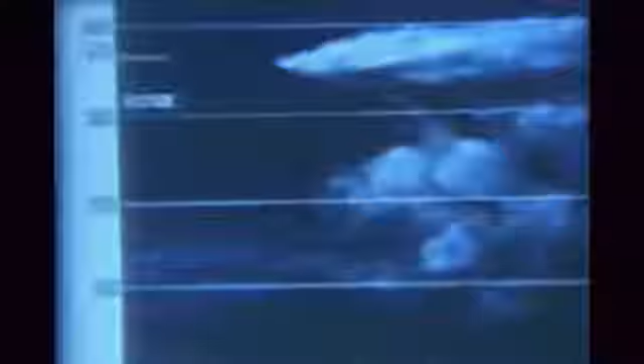July 13th, 1963. High over O'Neill, Nebraska, a B-720 aircraft is en route from San Francisco to Chicago with 53 passengers and a crew of 7. Thunderstorm activity is evident some 40 miles to the right of the flight path. At flight level 370, turbulence is encountered. Clearance is received to climb to flight level 410 in an attempt to top layers of cirrostratus clouds ahead.

As the climb is started, the aircraft experiences turbulence and goes into a sharp pitch-up. The instruments show a drop in airspeed and an increase in altitude. This is followed by a series of up and down drafts with high and low speed stall buffeting. The pilots report the attitude indicator to be unreadable at both extremes. The airplane then goes into an uncontrolled high-speed dive. Recovery is finally made at 13,000 feet.

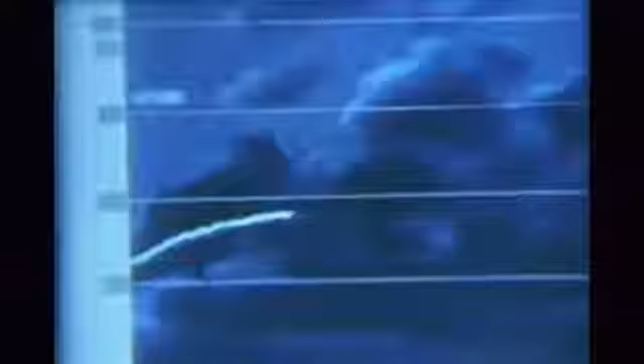November 9th, 1963. A DC-8 aircraft carrying 117 passengers is climbing through 18,000 feet after takeoff from Houston, Texas. Suddenly it encounters a severe gust that causes a rapid increase in rate of climb. The pilots report airspeed drops from 260 knots to 0. Control inputs are made. The nose pitches down and the aircraft goes into a steep, uncontrolled high-speed dive. During pull-out at 5,000 feet, the number 3 engine and pylon are torn off. The aircraft lands safely.

September 14th, 1964. Another DC-8 aircraft is cruising at 37,000 feet over the Pacific on a flight from the Philippines to Japan. There is typhoon activity in the vicinity. Suddenly, the aircraft hits turbulence and experiences a substantial increase in altitude. Then it noses into a 20-degree uncontrollable dive. Recovery is finally started at 21,000 feet, and the aircraft levels out at 17,500 and continues on its flight without further incident.

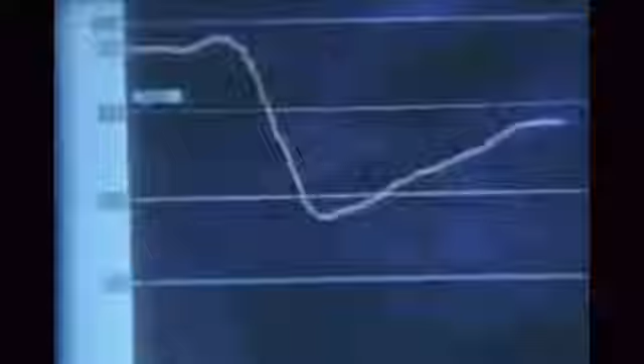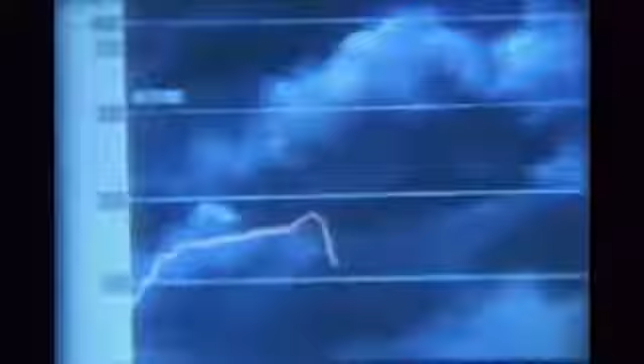February 12th, 1963. A 720B aircraft carrying 35 passengers and a crew of 8 takes off from Miami International Airport bound for Chicago. Considerable turbulence and thunderstorm activity is reported in the area. In his last radio contact, the pilot reports he is just out of 17,000 feet. The aircraft apparently enters an area of severe turbulence and goes into an uncontrolled high-speed dive. It crashes in the Everglades west of Miami. The wreckage pattern indicates a breakup in the air. All aboard are killed.

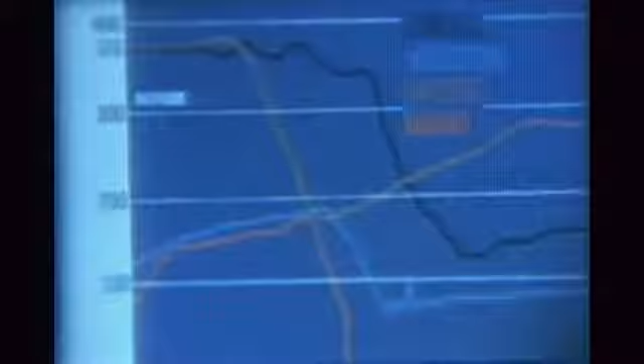All 4 of these major upset incidents are remarkably similar. When the flight recorder altitude tracing of each incident is superimposed over the others, this similarity becomes apparent. A thorough analysis of these incidents gives us some significant clues as to why these upsets have occurred. To understand them, we must review some basic principles of aerodynamics. Remember how an aircraft gets its lift.

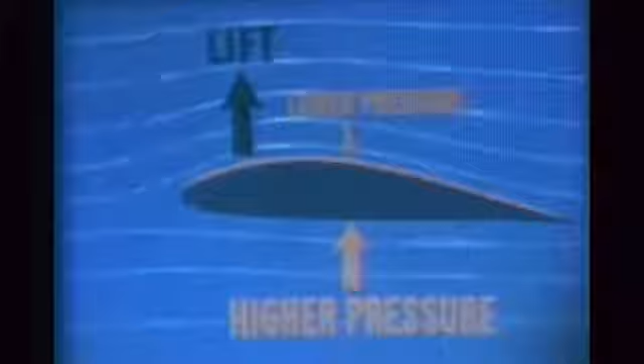The airfoil design of the wing causes the oncoming air to split, with some of it moving under the wing and some going over. The moving air forms a high-pressure area below the wing. However, the camber of the wing causes the air across the top to travel a longer distance. This results in an increase in speed and a lower pressure. It is the difference between the high and low pressures acting on the wing surfaces that causes lift in any aircraft.

Now, with the high-speed jet transport, another factor enters the picture. As the jet increases its speed into the higher subsonic ranges, the air flowing over the upper wing surface will at some point reach the speed of sound. This point is called the critical Mach number of the aircraft. At the critical Mach number, a shock wave is created on the wing, perpendicular to the flow of the air.

The shock waves normally form first at the root of the wing, where the camber is greatest. As the speed of the plane increases, the shock wave moves out from the wing root, and the center of pressure on the wing also moves out and aft. In other words, shock waves spoil lift inboard, and since inboard on a swept wing is the same thing as forward, lift is spoiled forward, and the nose naturally wants to go down.

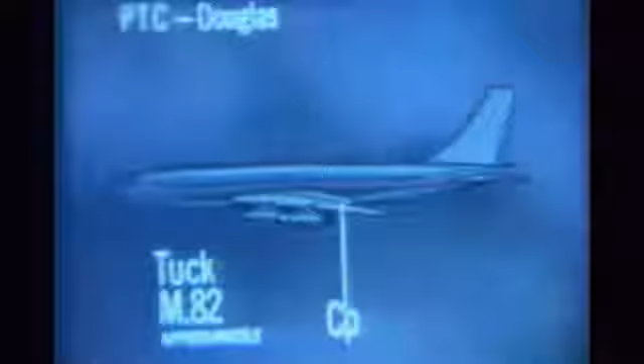The shifting of this center of pressure aft tends to make the aircraft nose down and increase speed. This, of course, is the phenomenon of tuck. It occurs about Mach 0.82. To provide stability at speeds above Mach 0.82, aircraft designers have installed control devices to overcome tuck. The pitch trim compensator in the Douglas jet aircraft cranks in an extra force on the control column for additional elevator. The Mach trim of the Boeing aircraft actually makes a stabilizer correction to prevent nose-over.

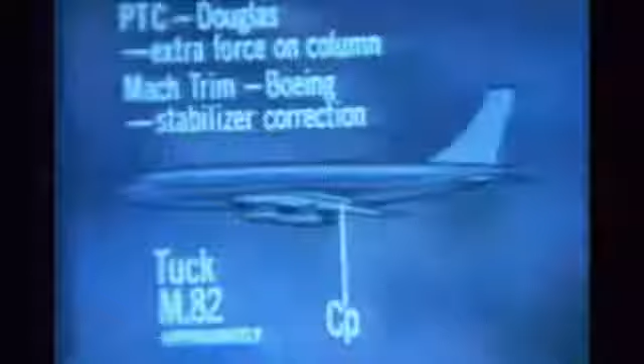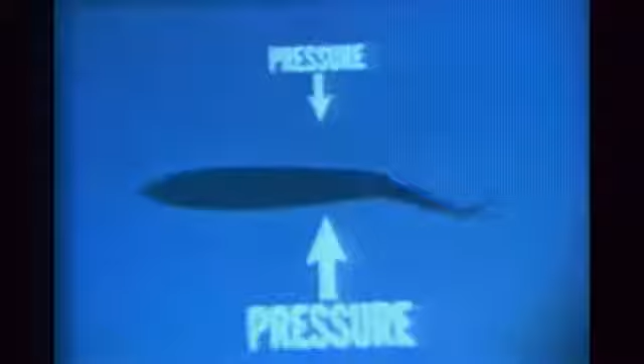This brings us to the stabilizer elevator surface itself, a critical element in the upset situation. Remember, the elevator on the jet transport controls the aircraft not because the air hits the surface and causes the plane to deflect, but rather because movement of the elevator changes the camber of the combined stabilizer elevator system and causes a greater or lesser pressure differential on the upper and lower surfaces.

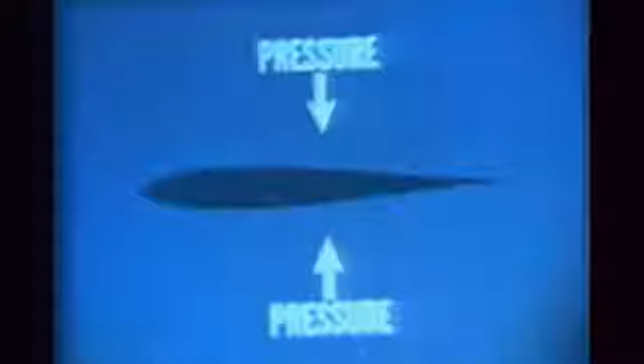Shock waves can develop on the stabilizer surface just as they do on the wing, but the greater design sweepback and thinner airfoil of the stabilizer prevents this from happening until the aircraft gets to speeds higher than its critical Mach number. But the point is this: shock waves do form on the stabilizer near normal cruise speeds, and when they do, they so disturb the air behind them that the elevator loses some of its effectiveness.

This graph shows how elevator effectiveness is related to speed in present-day jet transport aircraft. As speed increases, elevator effectiveness decreases. And you can see that at the cruise range for normal jet operations, the elevators may be less than 50% effective. This is plenty for positive control, of course. But let an overspeed condition develop, and trouble occurs.

Above MMO, the elevator has lost a substantial amount of its control effectiveness due to shock wave formation on the horizontal tail surfaces. This may not be too important in level flight, but if the nose is pointed down in a dive, it can present a severe problem in immediate recovery. Elevator effectiveness will return when Mach number decreases. A dive will result in decreasing Mach number as lower altitude is reached, so a dive itself can help bring about a successful recovery of control.

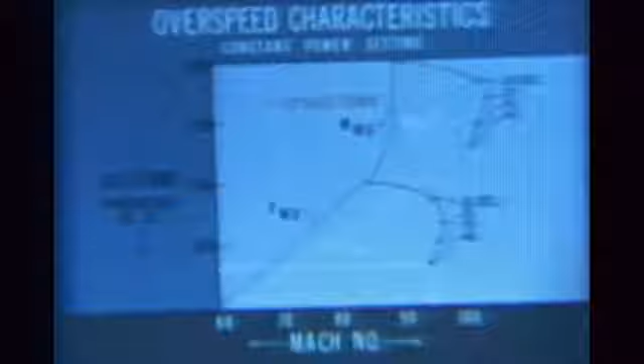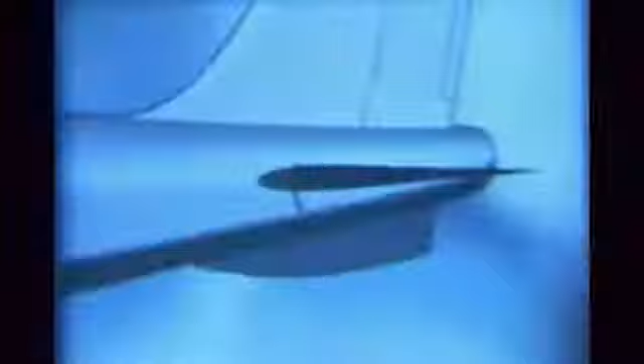At lower speeds, there is full elevator effectiveness. That is, unless the aircraft is in an out-of-trim condition. The movable stabilizer of the jet transport permits you to establish an angle of attack or indicated airspeed and keep it there. You know this, of course. In normal flight, this angle is always positive. It may range from close to 0 in high-speed flight to as much as 16 degrees at stall.

An aircraft can descend, cruise, or climb, trimmed for the same angle of attack, the difference determined by the amount of thrust applied. In any of these normal flying situations, the airplane's nose is pointed up. There is no overspeed, and there is always effective elevator. But consider what happens when the aircraft gets out of trim.

The stabilizer is much larger than the elevator, and thus more powerful. It takes about 3 degrees of elevator to offset the out-of-trim effect of 1 degree of stabilizer. If the stabilizer is 4 units out of trim, nearly all the elevator goes to fight the stabilizer, even at a normal angle of attack at low speeds. It simply has little left to control the aircraft. So, two important conditions that can reduce elevator effectiveness are high Mach number and stabilizer mistrim.

Of course, effective control with a stabilizer can be maintained as long as the drive unit functions. The stabilizer drive is designed to operate so long as the control maneuver will not exceed the air loads which would cause the stabilizer drive to stall. Mistrimming imposes additional loads on the stabilizer and causes the drive unit to stall more easily. Loss of control through stabilizer drive stall depends on the amount of mistrim and speed.

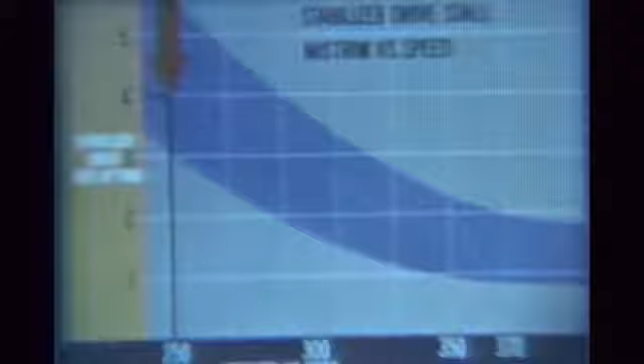On some aircraft, upwards of 4 units of mistrim may stall the drive in the 250 knot range. But it may be stalled by as little as 1 unit of mistrim at high speeds. Any elevator forces fighting the stabilizer will add additional loads that can cause the stabilizer drive to stall at lower speeds.

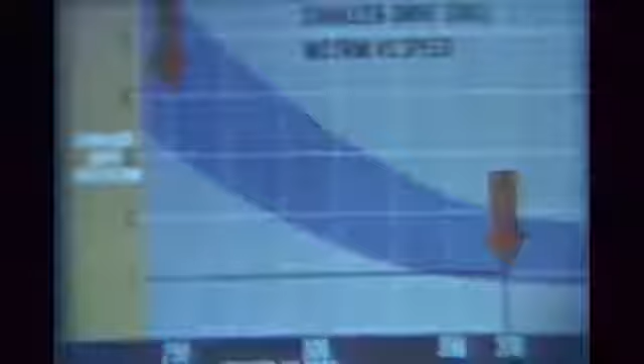Now, apply all this to the uncontrolled dive that is so characteristic of the upset problem. If a jet aircraft somehow gets both out of trim and into a high-speed dive, there will be little, if any, control effectiveness for recovery. If the pilot applies sufficient elevator forces, the stabilizer drive may be stalled. So, you can see why the aircraft is, in fact, out of control. Interestingly enough, each of the aircraft involved in the upset incidents described earlier were found to be out of trim in the nose-down direction.

How did these aircraft come to be mistrimmed? And why did they end up in high-speed dives? To understand these key elements in the upset problem, let's turn to Paul Soderlind of Northwest Airlines, who has made a thorough and comprehensive study of the problem.

The things you've just seen apply to the upset problem and help explain why the aircraft were actually out of control. To understand how they got into this situation in the first place, we have to piece together a typical upset, a composite, so to speak, of the examples already discussed. Although each one occurred in just a very few confusing moments, we will go slowly, step by step, and perhaps we can arrive at some conclusions.

Let's start with the aircraft in normal cruise. It doesn't matter too much whether it is in a climbing attitude or a normal cruise. Upsets have occurred in both conditions. But for the sake of illustration, let's assume it is in normal cruise and is flying under instrument conditions. There have been no known cases of serious loss of control of jet transports in clear air. All upsets where turbulence has been involved have occurred where there was no outside visual reference.

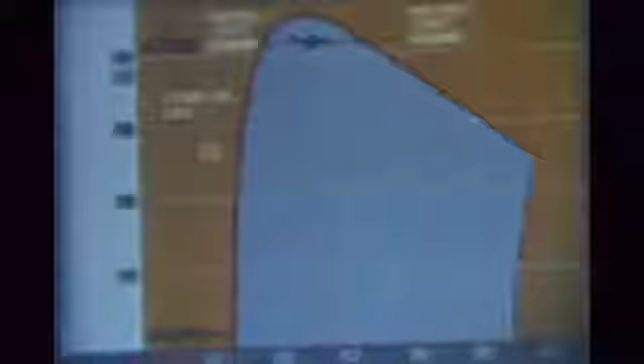For example, at 37,000 feet, the buffet-free speed range for a 270,000-pound Boeing 707-320B in 1G flight is 110 knots wide. If the aircraft slows to 185 knots, low-speed buffet begins. If it accelerates to 295 knots, high-speed buffet begins. The higher the altitude, the smaller the operating speed range there is between high and low-speed buffet. The lower the altitude, the greater the speed range. The higher the weight at the same altitude, the smaller the operating speed range.

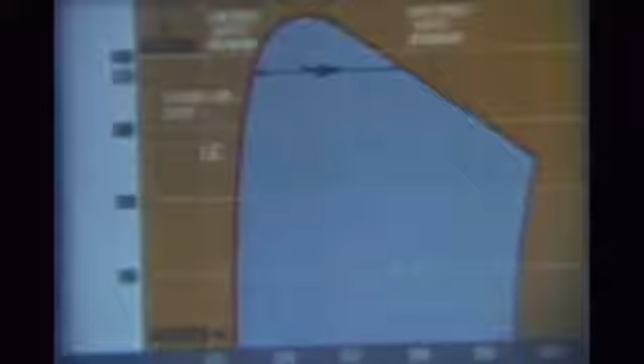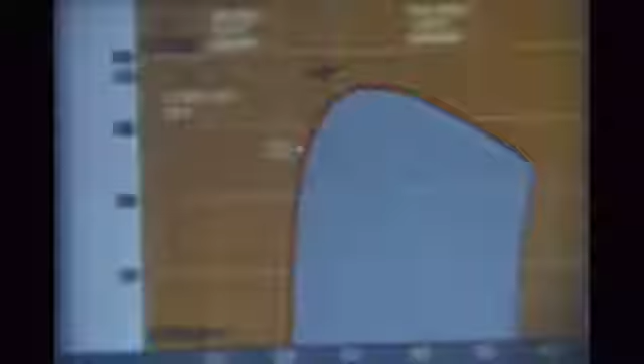Now, the buffet boundary curve for a given aircraft is also changed by an increase in G load. A turn, for example, will increase the G's and lower the buffet boundary, and the G load from a gust can do the same. As load factor increases, the buffet boundary pulls down, and there are thus smaller buffet-free speed margins. This is the buffet boundary curve for the same aircraft at the same altitude in a 1.5 G situation. He's right in the buffet area.

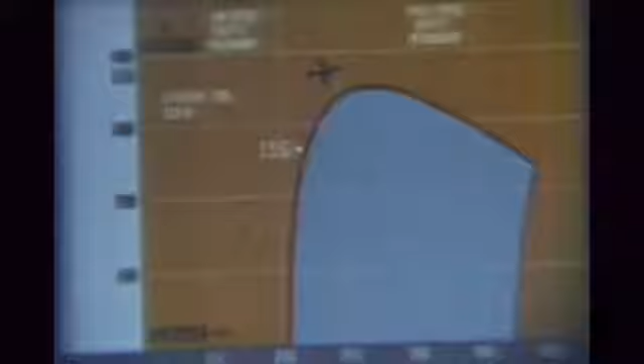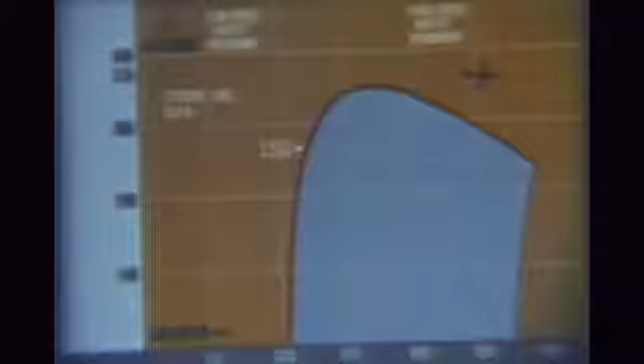Now, the pilot may not always recognize which kind of buffet he is in, since they can be quite alike in the way they feel. If he thinks he is in low-speed stall buffet, he will correct by adding thrust to speed up the airplane. But if it is actually high-speed buffet, this obviously will not help and probably will make the situation worse.

Now, with the buffet boundary phenomenon in mind, let's get back to our simulated upset situation. Here is our airplane, still proceeding at normal cruise speed at 37,000 feet. Up ahead is an area of severe turbulence. The first warning may be a few bumps. Then the airplane is hit by one or more severe gusts. The pilot, being human, is startled. His aircraft starts shaking violently. His instruments seem to go haywire.

He knows he is in an unusual attitude, but things have happened so suddenly he's not sure which way he's headed, up, down, or sideways. His cockpit is filled with dust and clutter, and he is straining to see his instruments, to find out what he should do. Now at this point, let's stop again and see what is happening to the airplane. A gust may hit an aircraft from any angle, but let's consider just the pitching plane, the most important in the upset problem.

An airplane acts like a weather vane. It pitches into the gust, and thus will pitch nose down as it enters an updraft. This action may be difficult for some pilots to accept, for it is natural to think that an airplane that is pointed down must be going down, and one that is pointed up must be going up. It is easy to understand if you keep the weather vane tendency in mind. The airplane weather vanes in pitch just as it does in yaw. This weather vaning effect may create immediate confusion for the pilot, for his instruments may not tell him clearly what is happening.

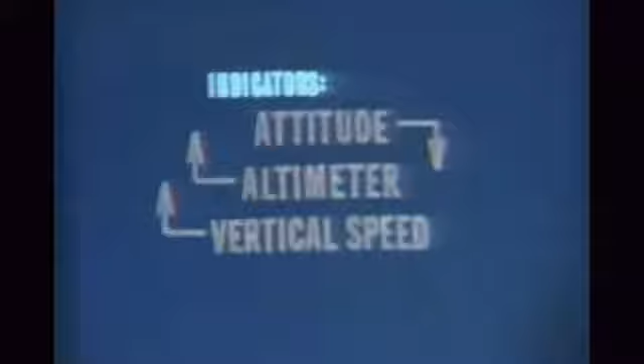Let's take position 7, for example, a vertical updraft. The aircraft will normally respond by weather vaning into the gust and pitching nose down. The attitude indicator correctly shows the pitch down. The altimeter shows an increase in altitude. The vertical speed indicator shows a climb. The airspeed indicator shows an increase, and the load factor also increases.

What do these indications mean in terms of elevator correction? The attitude indicator and the airspeed indicator call for a pull on the control column. All the other indicators call for a push. What then does the pilot do? Well, it may depend on what instrument he is watching. If his immediate reaction is to make a control correction, he may push instead of pull, and this may be the first step toward an upset.

We don't really know how significant false control cues are in the upset situation, but we do know they provide an unwelcome element of confusion at a time when there may be plenty of confusion in the cockpit already. If the pilot can't see the real horizon, he may not interpret the instrument readings correctly. The important point to remember is this: false control cues combined with the shock of the gust may result in the pilot making just the opposite control action from what is needed.

And if he tries to correct further with stabilizer control, he will mistrim the aircraft and be only seconds away from an upset. The autopilot can also cause mistrim in large vertical drafts without any input by the pilot. This can occur more readily if the altitude hold has been left on. More about that later. Meanwhile, let's continue constructing our typical upset.

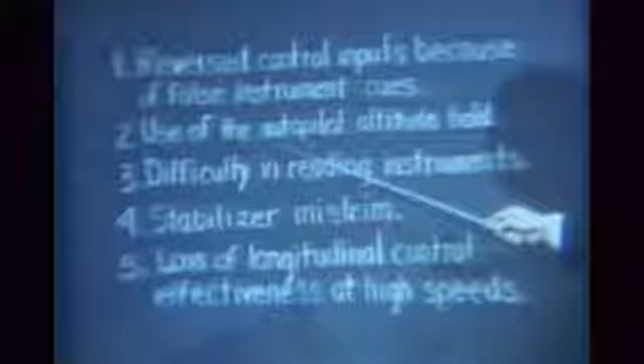What we have just reviewed is a greatly abbreviated and simplified version of what appears to happen in a typical upset. In summary, we can single out 5 factors that are possible upset causes. 1. Inadvertent control inputs because of false instrument cues. 2. Use of the autopilot altitude hold. 3. Difficulty in reading instruments. 4. Stabilizer mistrim. And 5. Loss of longitudinal control effectiveness at high speeds. There appears to be no evidence that the basic design of the aircraft or components such as the PTC and the Mach trim system have caused upsets to occur.

The isolation of these possible causes has enabled FAA to recommend a set of procedures that will minimize the possibility of an upset in turbulence. These procedures have been included in FAA advisory circulars, a number of airline pilot bulletins, and they have been presented to many jet transport pilots in training sessions. Although you may be acquainted with these procedures, we'd like to take a moment to review them with you again.

The first consideration when you enter an area of turbulence should be altitude. Remember the buffet boundary phenomenon. At the normal cruise ceiling for the weight and under, you can usually expect an adequate margin to buffet onset for turbulence up to moderate intensity. Moderate turbulence usually requires operating one cruise level, or 4,000 feet below normal cruise ceiling. The G-forces of greater than moderate turbulence will usually require operating 2 levels, or 8,000 feet below.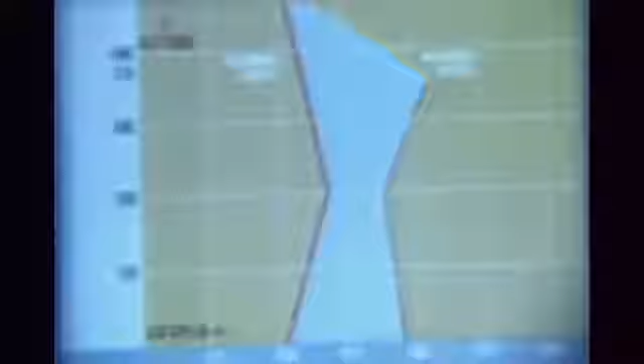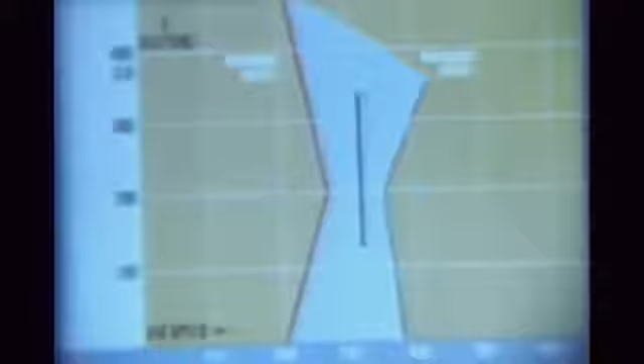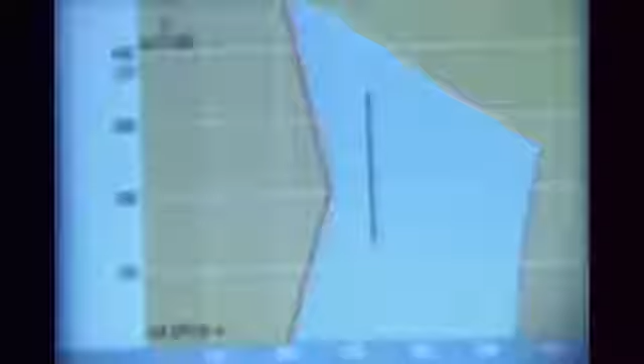Originally, a mid-range turbulence speed was recommended to be safe at both ends, high enough to protect against a gust-induced stall and low enough to prevent structural breakup. So, since the aircraft is actually designed to withstand the design gust at a considerably greater speed than the right-hand curve, it is apparent that the formerly recommended curve was needlessly low, and turbulence penetration speed closer to the high speed limit is more desirable.

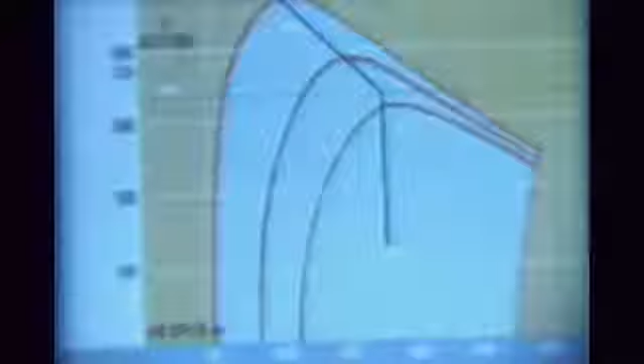Turbulent air penetration speed for nearly all present-day jet transports is 280 knots below 34,000 feet and Mach 0.80 above 34,000 feet. This higher speed will give you an acceptable margin to both low-speed and high-speed buffet, and is much preferred in turbulence. Even though it may cause your passengers to bounce around a little more than before, they will be trading a little comfort for greater safety.

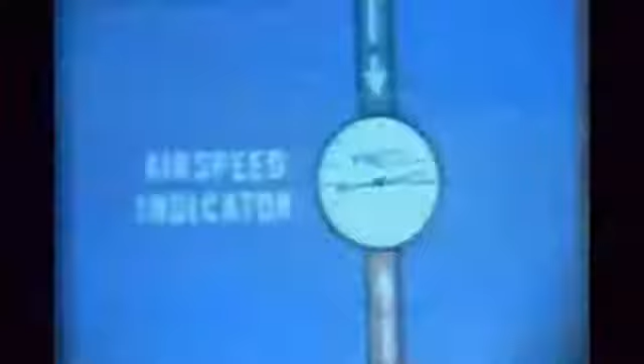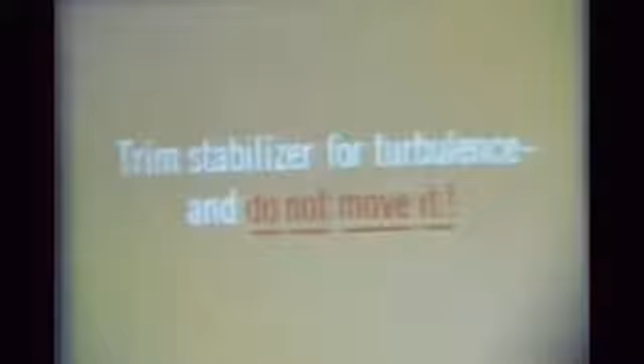Thrust should be set as required when entering turbulence and then left unchanged as much as possible. Don't be unduly influenced by changes in your airspeed indicator. It may fluctuate wildly, but remember that it is controlled by air flowing into a simple pitot tube on the wing. Severe gusts can drastically affect the amount of air entering the tube, and this can cause inaccurate readings of the indicator. If you keep your attitude and thrust constant, your airspeed will normally remain within reasonable limits. Trim the stabilizer for turbulence penetration speed and do not move it.

Use the autopilot, but turn off the altitude hold. This will help prevent autopilot-induced mistrim and will help you through a difficult and confusing period. The autopilot is not fooled by false pitch cues. It is unaffected by the stresses that affect humans. It is not confused by cockpit clutter. It sees every attitude displacement and makes a proper corrective input the moment it is required. The use of the autopilot leaves you free to monitor, to be alert for any possible mistrim or for an inadvertent disconnect. There has been no known case of an autopilot losing control of a jet transport in turbulence.

If you decide not to use the autopilot, it is recommended that you use the yaw damper in all cases. Wear a shoulder harness if greater than moderate turbulence is expected. It may be the only way you will be able to exercise control under the G stresses of severe turbulence or high-speed dives. In a nutshell, then, enter turbulence at the proper altitude, trimmed for the proper speed with the autopilot on, but with altitude hold off.

Then, once you are in turbulence, fly attitude. Fly it loosely. Avoid making any sudden control corrections. Don't chase airspeed or altitude. Just keep the plane as level as you can and let airspeed and altitude change. In other words, let the aircraft do the job. It is a rugged piece of machinery with plenty of structural integrity built in. It will carry you through turbulence if you just concentrate on keeping it straight and level.

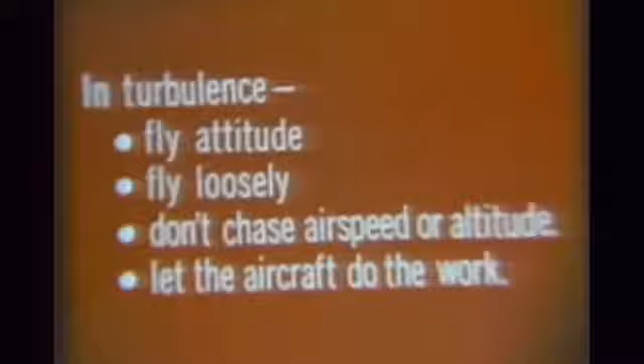Finally, there is one last recommendation, and it is obvious. Try to avoid areas where severe turbulence may be expected. There is considerable work currently being done to help you avoid turbulence. More about that in just a moment. A vast nationwide research program continues, combining the efforts of the federal government with those of the aircraft manufacturers and the airlines. However, they all admit there is still much to learn before the problem is solved.

One important part of the program is the National Severe Storms Laboratory, an FAA, NASA, Weather Bureau program that has helped bring about greater knowledge of turbulence and where it can be expected. Already, the findings of the laboratory have given aviation experts new and greater respect for the dangers of thunderstorm activity to the jet transport. Many of these findings have been made by the National Severe Storms Laboratory at Norman, Oklahoma.

Nearby, since 1960, specially instrumented Air Force jet aircraft have been making deliberate flights through thunderstorms in an attempt to correlate the actual forces of turbulence with radar reflectivity on the ground and in-flight radars. This project has been called Rough Rider, and the name is certainly appropriate.

These fast aircraft are controlled by an FAA air traffic controller working alongside a research meteorologist. As they are guided through various quadrants of the storm cells, airborne instruments record the intensity of the turbulence, and at the same time photographs are taken of what the radar scope sees. In this way, we can match up the degree of turbulence with its radar picture and gain information necessary to train operators of air traffic control and weather radars. Throughout the flights, close contact is maintained with the pilots.

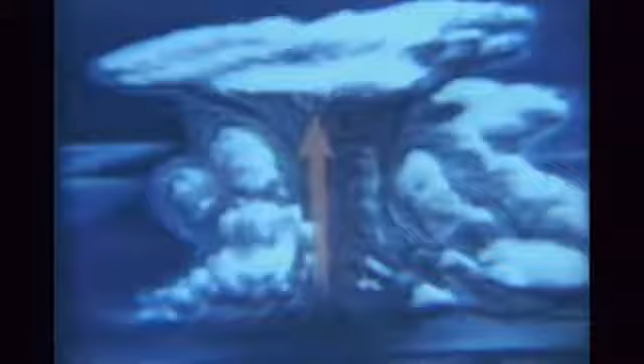Project Rough Rider and other National Severe Storm Project findings have shown that severe turbulence can be expected at some point in any thunderstorm. Usually it is most severe in the central or western part of the storm. It increases in severity with altitude up to 5,000 feet below the top of the cloud and can be especially severe in the cirrostratus overhang. It is usually most severe in areas of heavy precipitation, rain or hail, but it can occur even in clear air immediately above the storm cloud.

Thunderstorms are composed of cells that are continually growing and dying out. Vertical growth rates of 5,000 feet per minute are not unusual. Project Rough Rider has shown that severe gusts are only one problem of thunderstorms. The test aircraft flying near sonic speeds have been damaged by water erosion and hail impact forces. There's no question that commercial jet transport aircraft should give such storms wide berth.

Accurate and rapid forecasting of such storms is of special concern to pilots, and considerable work is being done at the Weather Bureau to do just that. The Severe Weather Forecast Center in Kansas City, Missouri collects data from all over the United States, assembles and evaluates it with computers, and prepares and releases detailed weather charts all within an hour or two. Efforts are now going on to see that this information is quickly made available to airlines and to air traffic controllers.

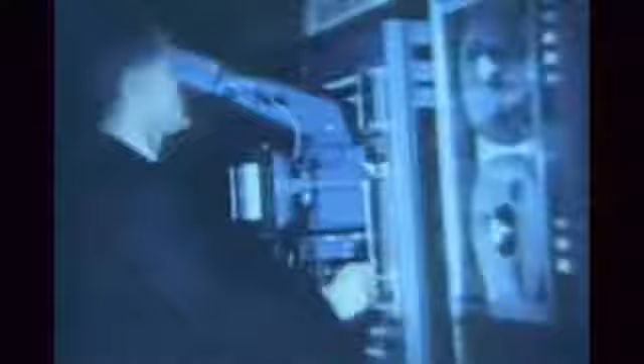In addition, new Doppler radar equipment is proving it can measure the velocities of gusts in thunderstorms and tornadoes, and promises to be another important means of acquiring turbulence data for dissemination to pilots. And of course, the use of weather satellites is just in its infancy, but already they're helping weather experts detect and locate severe storm areas. Getting this information to pilots in flight remains the problem. And here is where a current FAA air traffic control radar project promises help.

As most pilots know, air traffic controllers today cannot provide vectoring assistance through areas of severe weather. With the advent of circular polarization, weather was virtually eliminated from the controller's scopes, and he could see aircraft clearly at all times. This was a major advance in air traffic control, but as a result, pilots have had to rely on their airborne radars for most turbulence avoidance. Now, however, the FAA is evaluating a new air traffic control radar system that reintroduces weather on the scope under controlled conditions.

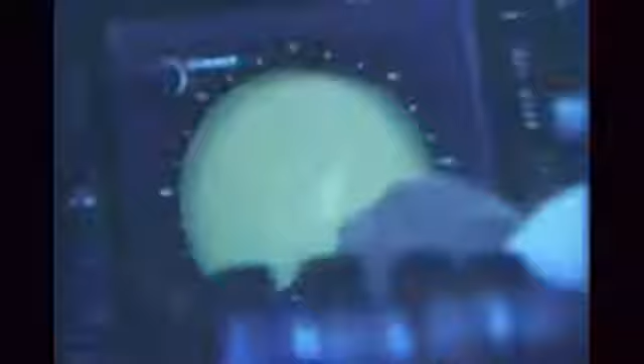Also promised for the future is an airborne turbulence detection device. One already under test by an airline is sensitive to slight temperature variations found to be present in areas of turbulence, and can signal the presence of even clear air turbulence as far away as 5 to 10 miles. But until this device or others have been thoroughly tested and proved in use, it is suggested that all jet transport pilots pay close attention to the operation and maintenance of their airborne radar equipment, and take extra pains to learn how to identify areas where severe turbulence may exist. For the present, your airborne radar remains the primary tool for avoiding severe turbulence.

Meanwhile, in addition to studies into the nature of storms and how to avoid them, there is considerable research being carried out with respect to the aircraft itself and the pilot's cockpit environment in turbulence. One area of concern has been the instruments. Since instrument readability was determined clearly as one cause of pilot confusion in turbulence, there have been a number of modifications and new designs. Already many airlines have installed a new type attitude indicator that continues to show the plane's attitude and recommended control action no matter how steep the pitch.

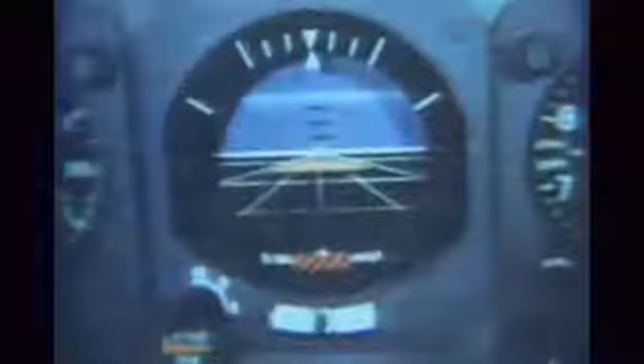In addition, improvements have been made in flagging of inoperative instruments. Another project of current special interest is called TAPER, Turbulent Air Pilot Environmental Research, a joint NASA-FAA effort. FAA transport aircraft have been specially instrumented for flights into areas of turbulence to explore the dynamics of the plane itself and study what actually happens to pilots flying in turbulence. And stress data have been put on tape so they could be fed into aircraft simulators and studied.

This is a film taken during a test flight, with the action slowed down to about 1/3 of normal. It shows a most interesting phenomenon and helps explain why some pilots involved in upsets have reported their instruments to be shaking wildly. You can see clearly that in this particular type of turbulence, the instruments are actually steady. The pilots are doing the shaking. This leads to the conclusion that nystagmus, sometimes called eyeball bounce, may be a factor in pilot disorientation during turbulence.

That's right. I'm Dave Thomas, Deputy Administrator of the Federal Aviation Agency. It has also been shown that repeated exposure to certain types of turbulence can cause an aircraft to vibrate at its natural frequency, much as a tuning fork. The frequency happens to be about 4 cycles per second, and that, coincidentally, is a frequency at which human beings have been proved to function the poorest.

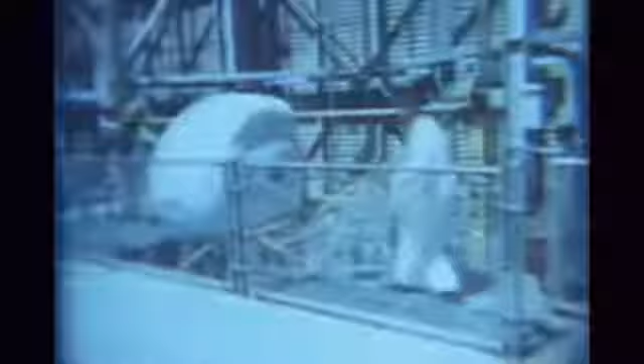Further tests have been carried out at NASA's Ames Research Laboratory in California. Here, stress data obtained during actual flights in turbulence are fed into a height control apparatus simulator called HICONTA. Many pilots have flown this vertical simulator, and their performances in turbulence have been carefully studied. Since the Ames simulator has only 100-foot travel, other tests have been run at the Navy's Air Research Development Center at Johnsville, Pennsylvania. There, a human centrifuge can simulate more sustained G-forces.

Film studies of pilots undergoing extreme G-stresses also help explain the disorientation reported by those who have experienced upset. What have the simulator tests proved? Chiefly, they have shown clearly that severe turbulence can and does seriously affect the pilot's ability to function efficiently, even though everyone who flew the simulator knew he was going to be subjected to unusual stresses and was prepared for them. A few pilots lost control. Research continues to discover why.

Meanwhile, the studies have indicated that pilot disorientation might be greatly reduced if he could somehow be separated from the plane's vibrations, perhaps in a special seating arrangement that would, in effect, float him in the cockpit. Further developmental work is also being carried out in this area. You can see that there is still a lot yet to be done before the upset problem is conclusively solved. But every test we perform, every study we make, brings us closer to a solution.